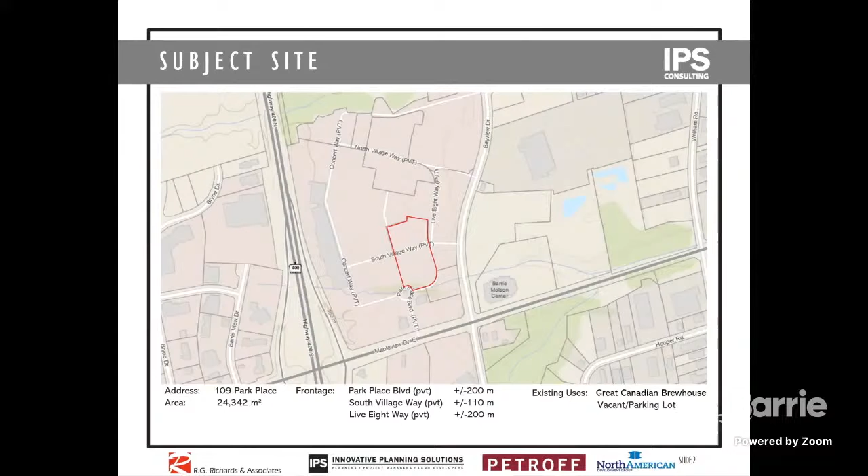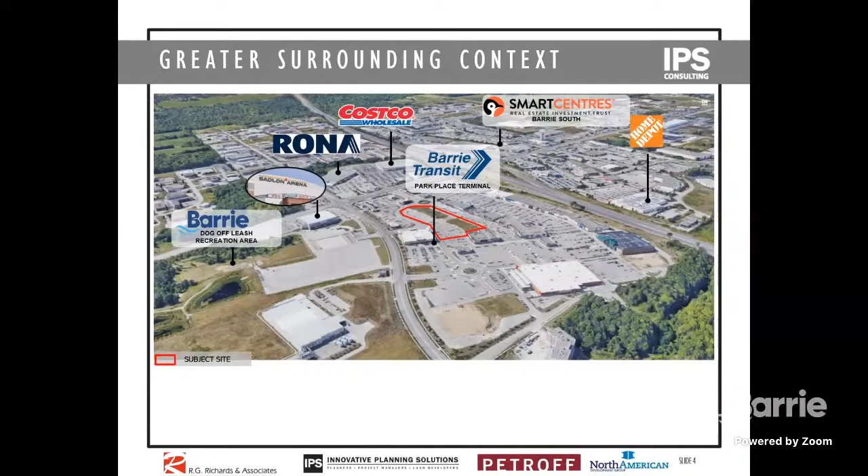For greater context surrounding the Park Place lands, there are a number of large big box users: the Rona, the Costco, the SmartCentres site located kitty corner to us at the interchange of Mapleview Drive and Highway 400, and also the Home Depot. I also want to note an important community building, the Sadlon Arena, and the Barrie Dog Off-Leash Park located beside the Sadlon Centre, used quite often by residents with dogs.

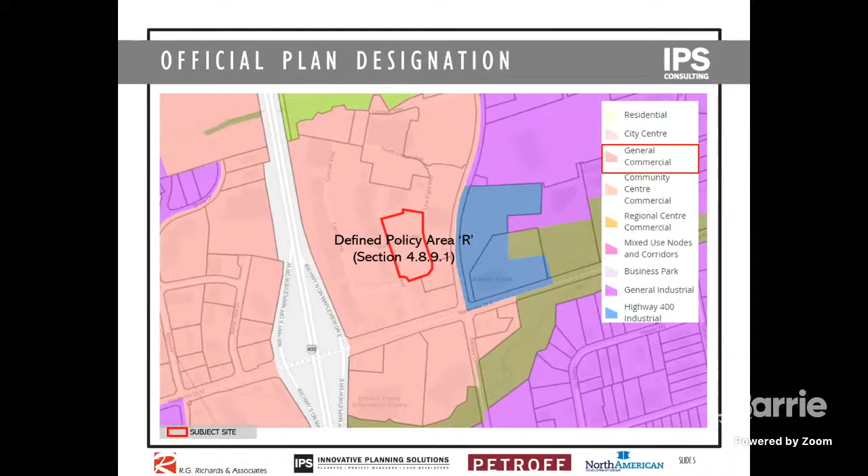The current official plan context for this site dates back to when these lands were subject to an Ontario Municipal Board hearing. Through that hearing, the lands were designated general commercial with a special provision. It's recognized in the city's official plan as defined policy area R. If you review the official plan under section 4.8.9.1, you would find the policies related to the Park Place lands and how they've developed to date.

Similarly, from a zoning perspective, the lands currently possess a general commercial C4 zone with a special exception. It's a very detailed exception relating to the overall master plan of Park Place Village, and those provisions are contained under section 304 of the bylaw.

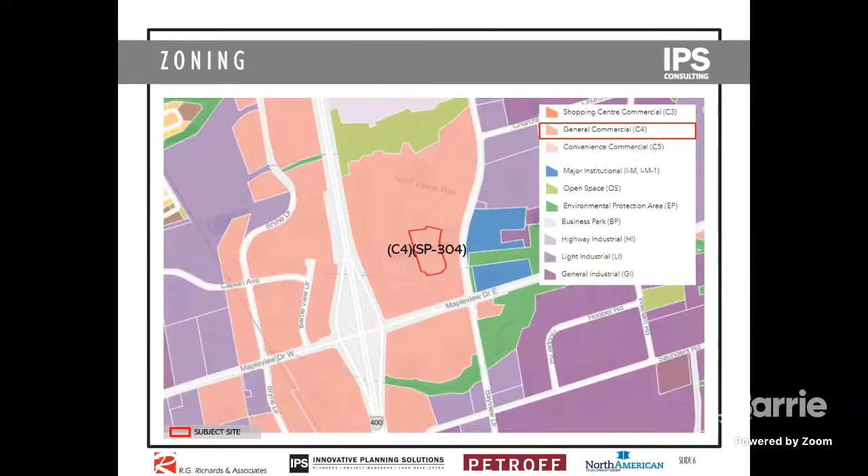So the amendments before you this evening are a first for Barrie, in the sense that we are proposing to add residential development to a regional commercial shopping area. That hasn't been done yet in Barrie, so we're excited to be first in bringing a new mixed-use style of development to a major regional destination. The amendments before planning staff and ultimately planning committee will seek to permit residential uses within the defined policy areas contained in the official plan, as well as the special provisions in the zoning bylaw under the general commercial zone.

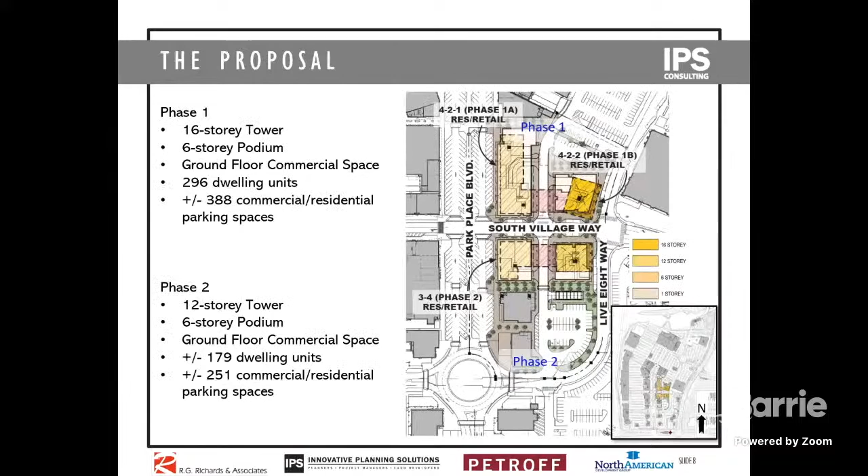With that, I'm going to turn the presentation over to Aly Hamby, who will describe the proposal. Thank you, Darren, and good evening everyone. My name is Aly Hamby. I am a partner at Petroff Partnership Architects.

Just for a bit of context and background, the Park Place Master Plan is centered around the theme of a main street, right in the heart of the property. It's a district where the design of the outdoor public areas emphasizes great pedestrian-friendly environments and well-appointed, accessible public spaces that create a unique open-air shopping experience. The illustration you see is a blown-up site plan of the new residential development within the village district.

And the inset drawing on the bottom right is a key plan showing the development in the context of the overall shopping center master plan.

When completed, this new community will be made up of 2 residential buildings with active at-grade uses, complemented by new landscape amenity areas. These are early days in the process, so in terms of residential statistics, we are talking about approximately 350,000 square feet of development that will take place over 2 phases, with an anticipated 475 units planned. Resident parking is planned to be located below grade generally, while resident visitor parking and retail patron parking will be located at grade.

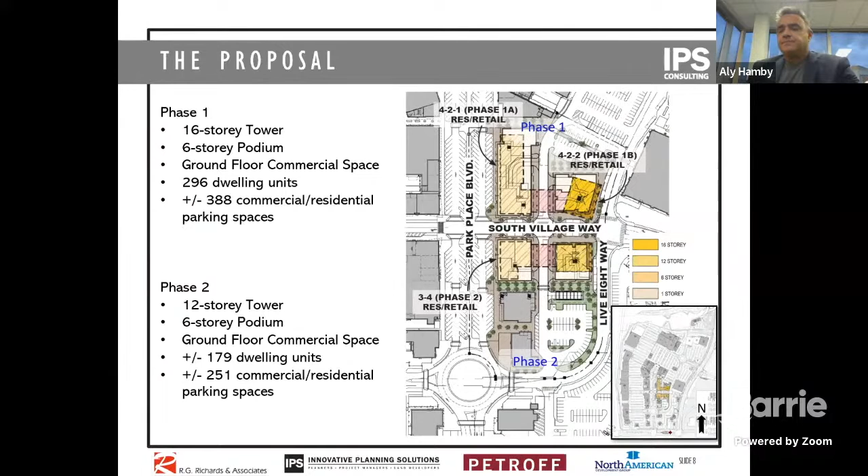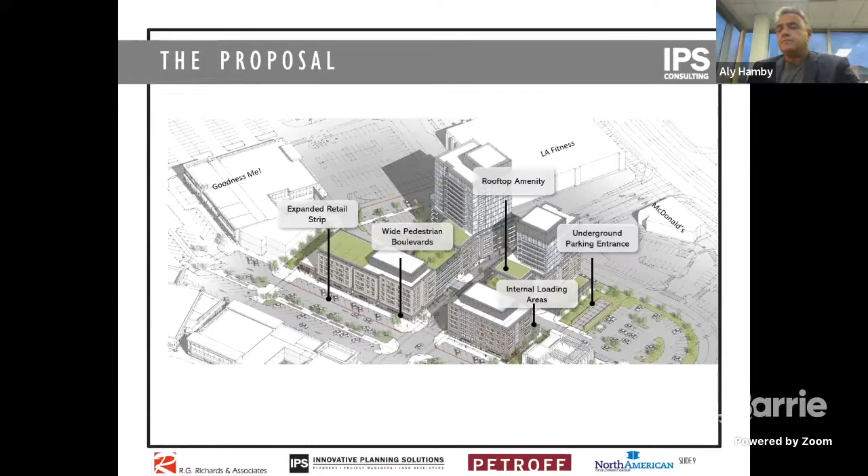Residential blocks fronting onto the village have been sized in terms of their length and height to be compatible with the existing village's pedestrian scale and are suitably proportional to the 40-meter wide village boulevard. This approach is best for maintaining the current open-air village experience and walkability while facilitating proper building height transition.

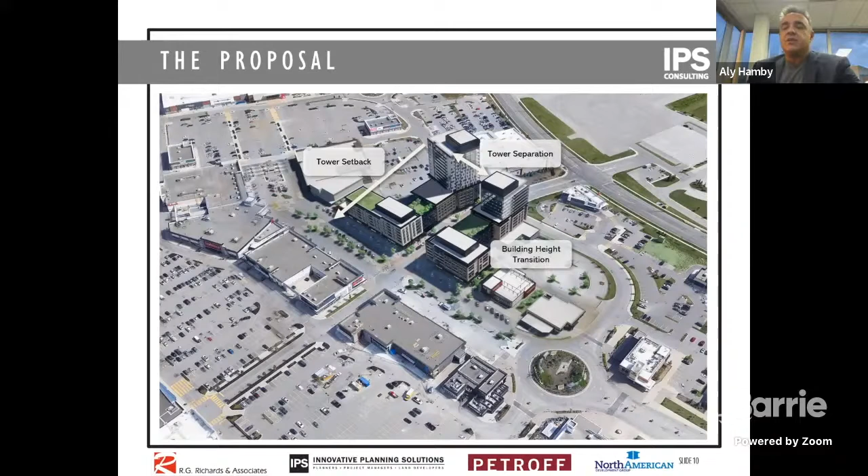Building height transition of the village is further achieved by locating the taller residential point block towers furthest away from the village. By keeping heights lower at the village, the 6-story blocks can still contribute to the village in a positive way while mitigating the impact of deep shadows sometimes associated with the taller residential blocks.

Durable premium finishes are planned for all of the new residential buildings that we are planning, and those finishes will maintain the same look and character of the material palette you see today on the retail village buildings.

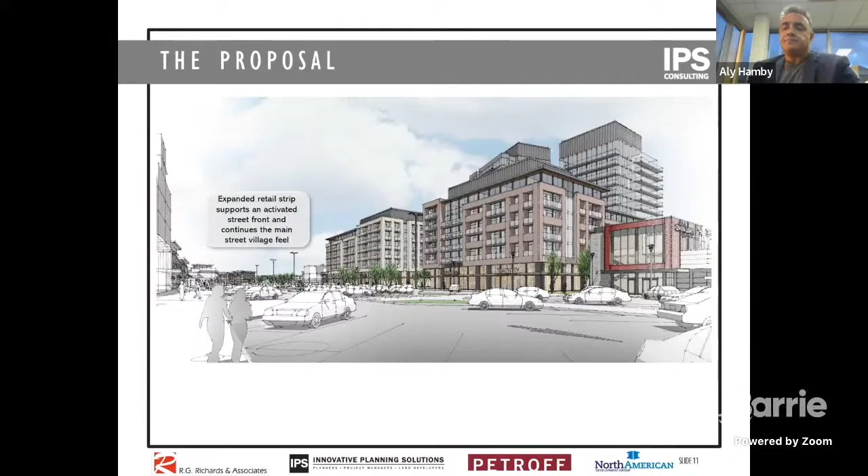The village district of Park Place has been designed from a pedestrian perspective with walkable streets, principal entrances, and active storefronts, and is very well suited to support residential intensification. We believe the village district will in fact become even more vibrant and engaging with the addition of the proposed residential blocks and their associated public areas.

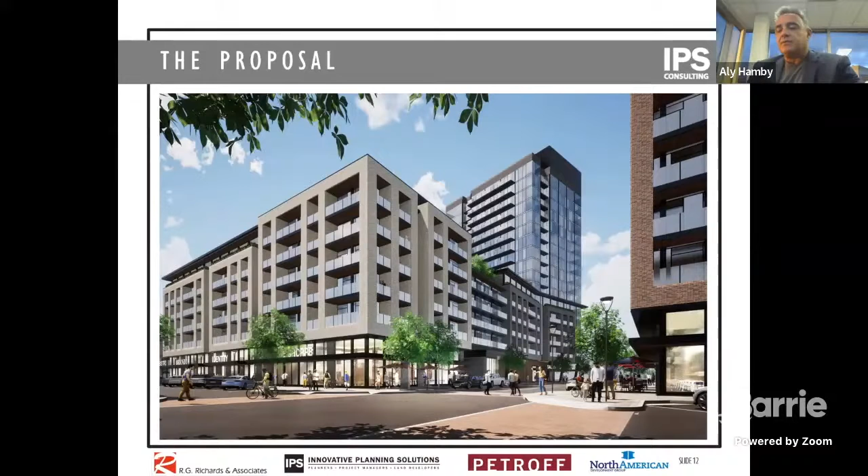In fact, our goal in designing the residential blocks is to further enhance and add to the village's already wonderfully landscaped sidewalks, amenities, patios, and plazas, all of which will benefit from the natural surveillance and overlook that the new residential will offer by way of upper story apartment windows, balconies, and rooftop amenity terraces.

Residential blocks fronting on the village will maintain the same active retail and restaurant uses at grade that we see today on the existing main street. And with the expansion east, we will create a new opportunity to expand the commercial frontage to meet the new point block towers. This village expansion east allows us to improve and reinforce existing connections to Bayview Drive and to existing locations on site such as the Barrie Transit Bus Hub and LA Fitness.

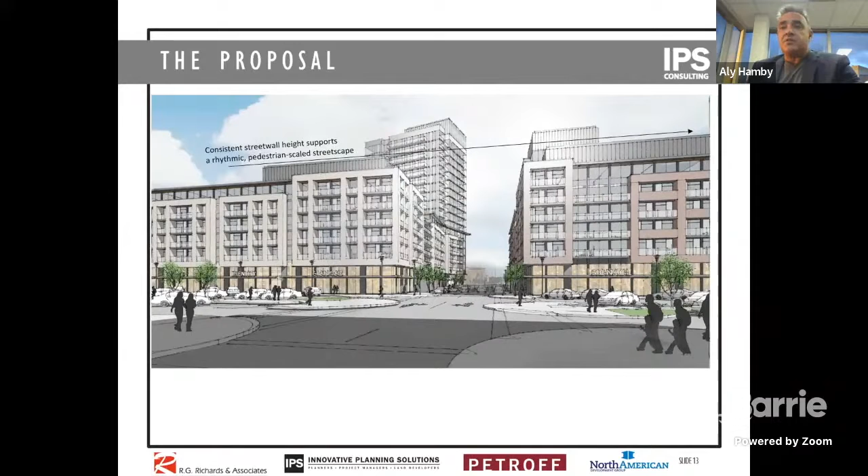We are really excited about the idea of introducing residential to this established center and the synergies that will be created with the many shops and services that will be accessible from the new residence doorstep.

In fact, the Park Place Master Plan has in place numerous pedestrian connections and linkages, as Darren alluded, to many community-oriented amenities, all within a 15-minute walk from the proposed residential development, including many shops, restaurants, and services, a 20-acre naturalized park, the Barrie Transit Bus Hub, a dog run park, and the Barrie Colts Entertainment Complex.

These connections and linkages for the Park Place Master Plan is the framework that it's built on, and it's one that supports mixed-use intensification at this center, as well as supports the outdoor public spaces that we will add to make such developments a success, such as this example, a proposed pocket park that we are imagining that will be located right off of the village main street.

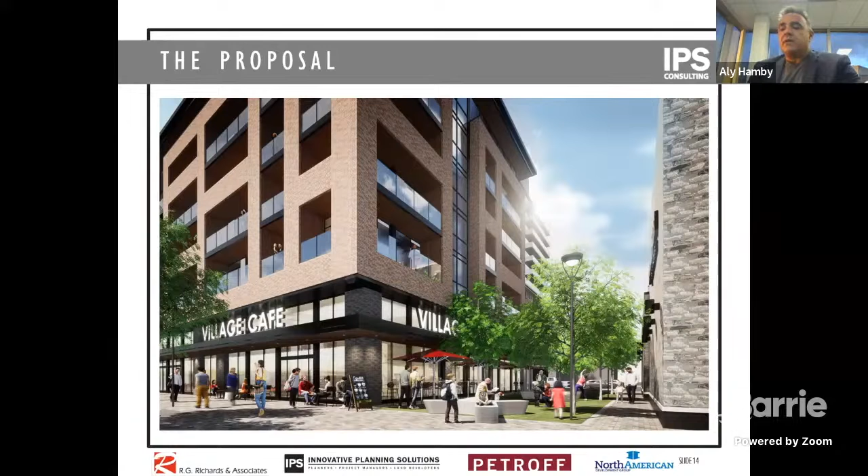And so in closing, I'd like to say that as a team, we are really excited to advance this opportunity to see residential intensification at Park Place. Through our continued consultation with the city and the community, our goal for this property is to see it continue to thrive and to evolve from taller buildings and higher densities into a true mixed-use complete community that will support the growth, the future growth and the longevity of this popular lifestyle center and this area in South Barrie.

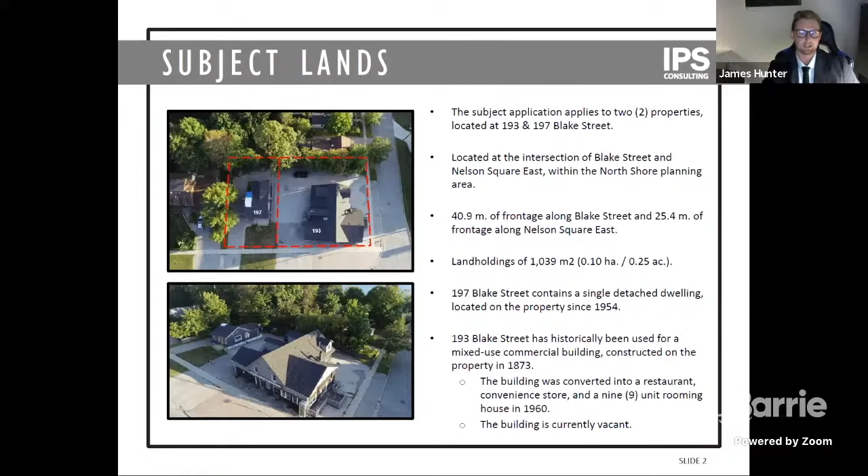The 197 property contains a single detached dwelling that has been located on the property since 1954. The 193 Blake Street property has historically been used for a mixed-use building, which has been on the property since 1873. The building was converted into a restaurant, convenience store, and a 9-unit rooming house in 1960. However, this building has been vacant for a number of years.

The surrounding land uses of the subject lands are quite diverse. To the north is general commercial, then low density residential further north. To the east is low density residential primarily, and along Vancouver Street there is a 4-story condo, a 4-story apartment, and a 3-story apartment. To the south is low density residential, and adjacent to the west is the Parkview Community Center, as well as Nelson Square Park, and then a mix of low density residential and the Nelson Square lookout.

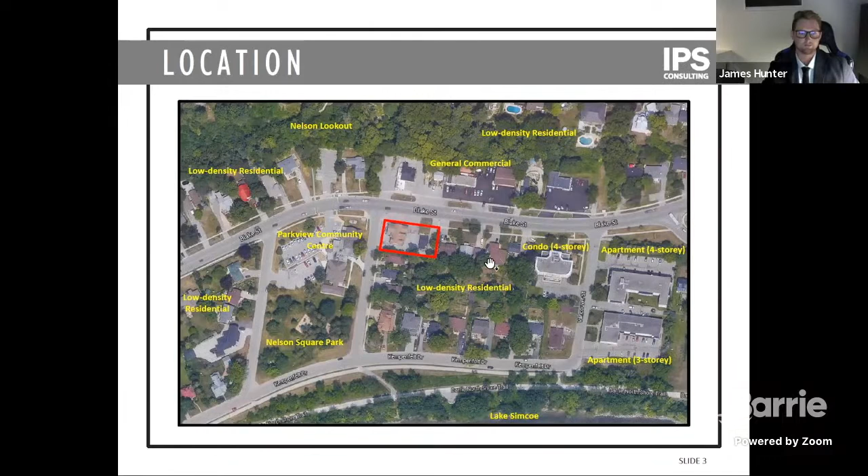The application before us is a 5 townhouse unit development with a 4-story building height. The density proposed is 48 units per hectare. Each lot will have a range of size from 183 to 242 square meters, with frontages ranging from 7.2 to 10.1 meters.

Larger unit sizes are proposed, between 217 and 222 square meters, which is in the mid 2,000 square feet range. Site access for each unit is off Blake Street, with a singular access by a double driveway to units B, C, D, E, and one driveway to lot A. This represents a parking ratio of 3 spaces per unit for 4 of the units, and the end unit has a parking ratio of 2 spaces per unit.

We've included a 7-meter front yard setback, as well as a 7.1 meter rear yard setback, and then we have a 3-meter exterior side yard to Nelson Square East.

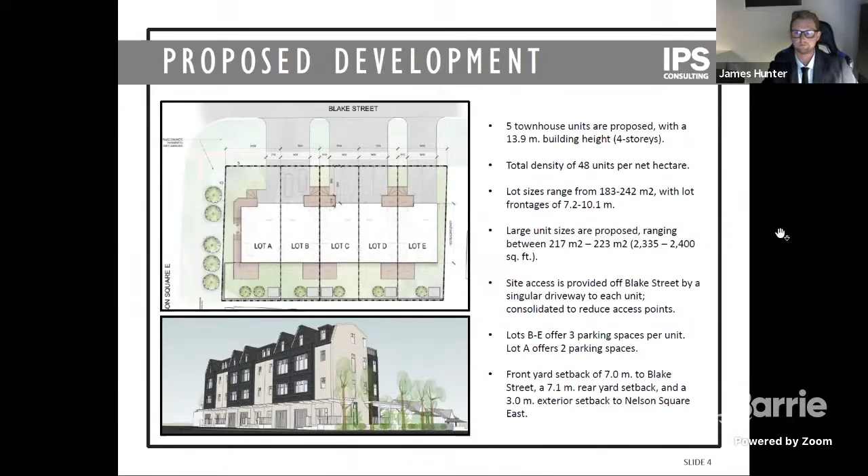The applicant is targeting a high standard of architectural design to match the local market and quality of homes in the surrounding neighborhood towards the shore. The images here are conceptual renderings of what the potential townhouse is to look like.

What we do have included are amenities on the 4th floor, including a private loft and a terrace overlooking the rear yards. We have a flex space on the ground floor level for a home office or a gym, and we also have 91 to 125 square meters of landscaped outdoor amenity space in the rear yard, which provides private patios.

At the corner location, the exterior unit has been designed to frame the street corner, providing heightened curbside appeal and a pedestrian-scaled built form. The landscaped open space has been preserved around the perimeter of the site to implement enhanced landscaping measures and an improved public realm.

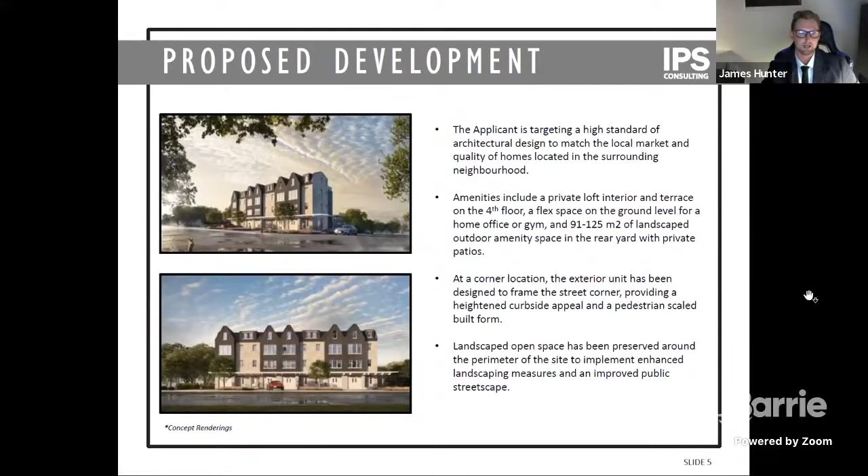The subject lands are currently designated as general commercial by the 2018 official plan. They are located on Arterial Road, which is Blake Street, and are also within the built up area. In order to permit a townhouse development, we need an official plan amendment to the residential land use designation.

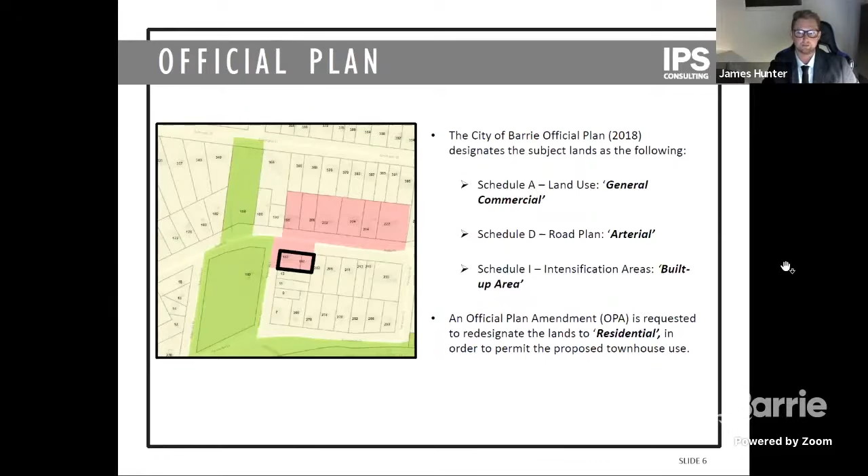To provide a brief overview of the official plan, the residential land use designation does permit all forms of tenure housing. The lands are within the built-up area, which the plan directs at least 40% of residential dwelling unit development to be within on an annual basis. Intensification represents an essential component of the city's growth management strategy, with support for medium density developments in order to provide a complete range of housing choices for residents.

Intensification and redevelopment is encouraged to promote an increase in planned and built densities and to achieve a desirable compact urban form. The proposed development does satisfy the locational criteria and the staging and phasing policies of the official plan. The official plan directs the zoning bylaw to be amended to allow for innovative housing, where it is recognized to be in accordance with good land use planning principles. In summary, the subject development is supported by the objectives of the official plan.

To accompany the official plan amendment, we are also seeking a zoning bylaw amendment. The subject lands are currently zoned general commercial C4, and to permit a townhouse development, we need a zoning bylaw amendment to the residential multiple dwelling second density, the RM2TH zone, along with our rezoning requesting site-specific special provisions.

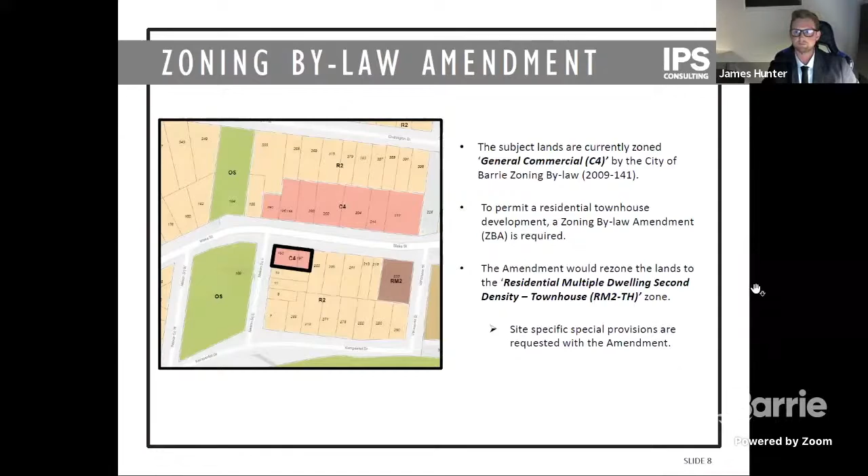To support our application, a number of technical studies have been done, including a planning justification report, a market study, a shadow analysis, engineering report, geotechnical report, hydrogeological assessment, arborist assessment, architectural drawings and elevations, and phase 1 and 2 environmental site assessments.

In conclusion, the applications would permit the development of 5 townhouse units. To permit this development, we would need an official plan amendment from general commercial to residential, as well as a subsequent zoning bylaw amendment application to rezone the lands from general commercial C4 to residential multiple dwelling second density townhouse with special provisions.

Development through intensification is supported as it efficiently utilizes land, existing infrastructure and services, and contributes to a more desirable compact form. The proposed development offers suitable residential intensification within the built-up area of the city on lands that are underutilized and ready for redevelopment. In support of improved housing attainability, the proposal would contribute to diversified housing options in the city, while also assisting the city in achieving its directed housing and density targets.

Collectively, the development does align with all levels of policy, seeking evolution into more complete communities. Thank you, Planning Committee, that concludes my presentation. I would be happy to answer any questions directed my way.

Thank you very much, Mr. Hunter. I will, yes, and Tyler Butler is our planner. I confused the names earlier. I'm sorry, Tyler. Thank you for coming to Planning Committee tonight, and if you can give us an update on the status of the application.

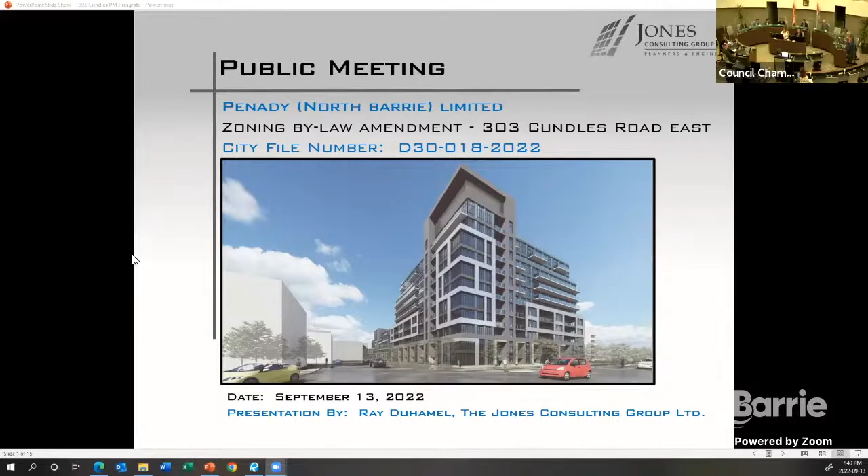The lands themselves are proposed for residential, and I'll speak to that in a few minutes. These form part of a much larger master plan block, which substantially has been developed to the east with regional and local level shopping, including retail, a gas bar, and a number of service commercial uses. The master plan is approved for upwards of 500,000 square feet for that area, and immediately to the west is the Junction residential development.

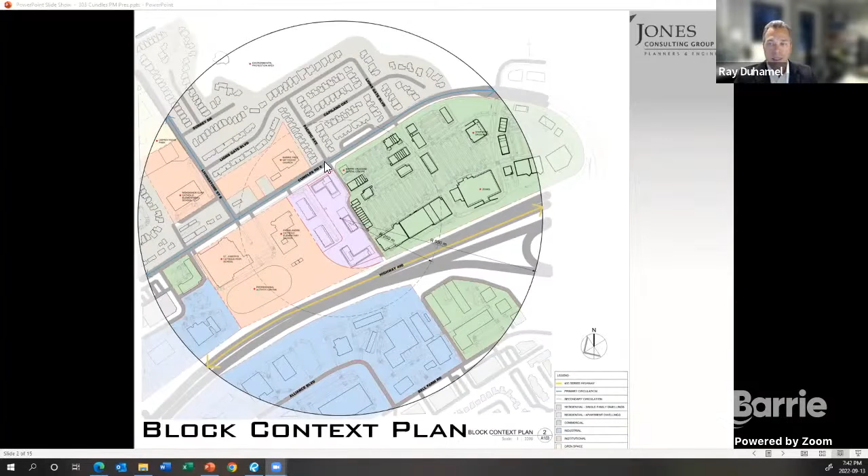This next slide shows an aerial photograph of the property. It's currently vacant. The site is 1.93 hectares of an overall 18-hectare site that's been comprehensively developed, with 74 meters of frontage on Cundles Road East on this particular part of the property. The right side of the screen is zoomed in to give more detail, showing the existing commercial, and the 2 buildings immediately to the west, the junction residential buildings.

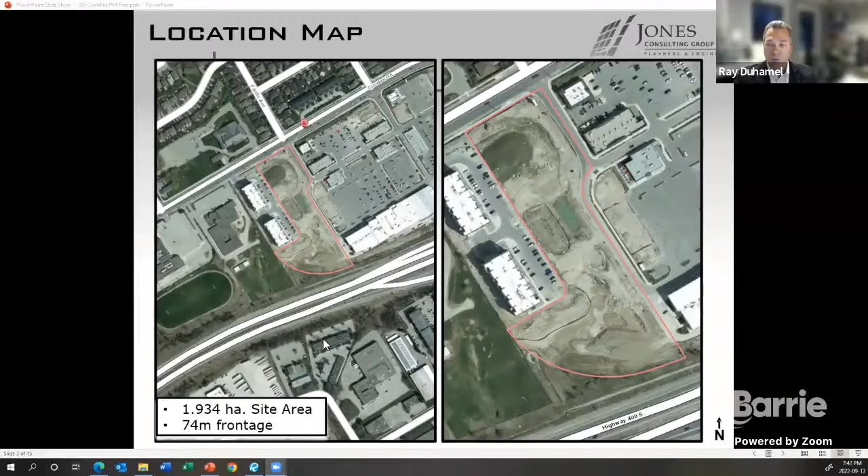A few streetscape shots to provide some context. Immediately across the street to the north is the Free Methodist Church, and then there's the exterior side yard of a single detached dwelling fronting onto Pacific Avenue. If you're looking east from Cundles Road, you'll see the commercial development that exists.

That's part of the master planned 18-hectare site. Looking south on Cundles Road, straight south, you can see Highway 400 in the background. And on this plan and the plan to the west, you can see the junction residential development of 6 stories and 120 residential units.

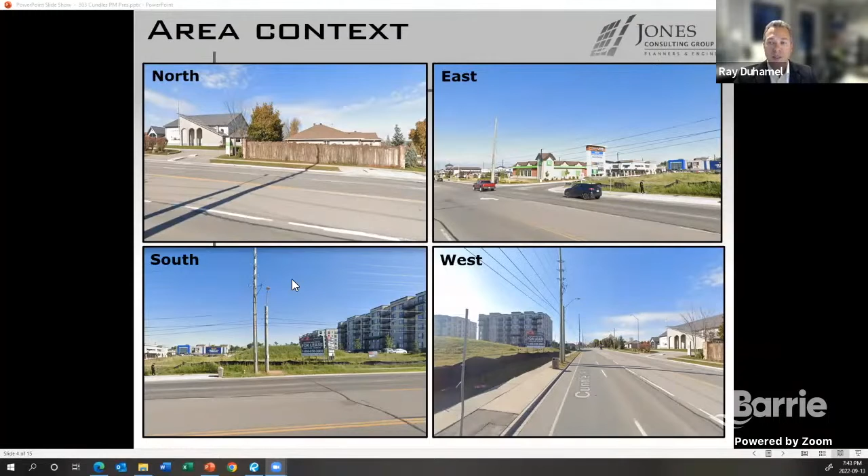This site has a long history of planning approvals and master planning, dating back to 2006, when an official plan amendment was adopted by council to permit mixed-use development on the lands. There was a corresponding zoning bylaw amendment approved also in 2006 to permit a mixture of residential and commercial. Another zoning bylaw amendment was approved in 2015 that allowed for an established parking ratio, and the current zoning permits 200 units across this entire residential site.

There was a series of master development agreements and plans developed over the years 2012 to 2013. The most recent activity on the site is the construction of the junction. The approvals were granted in 2016 for both a zoning bylaw amendment and site plan approval.

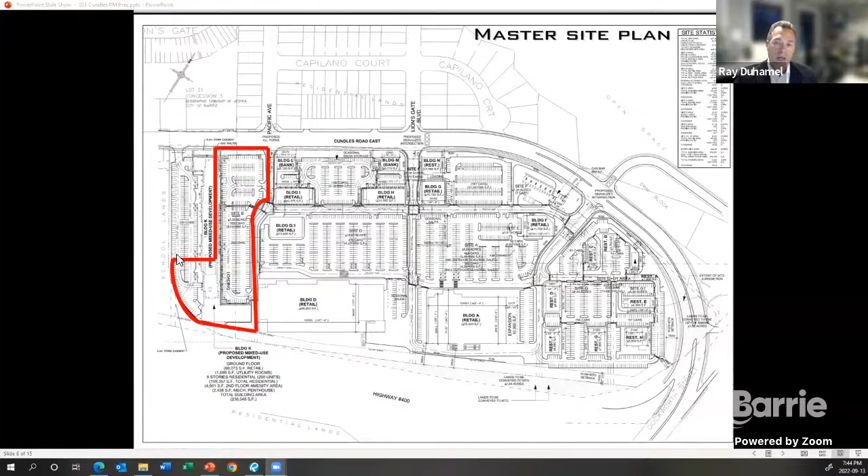There's so much detail in this plan. I just wanted to show it for illustrative purposes because this is about 10 years old now. This is the master plan showing the overall development of this whole site. What's changed is really the junction area and this area in red, which is the proposed 303 Cundles Road East.

The provincial policy statement and the growth plan are fairly integral documents to land use planning in Ontario, as I'm sure most are aware. Both of these documents have been amended several times. There's actually been an entirely new provincial policy statement twice since the original 2006 master plan for this overall site was approved. But overall, in my view, the proposed application, as I will illustrate in a few slides, implements the provincial direction towards creating compact and efficient use of land and optimizing existing infrastructure on the site.

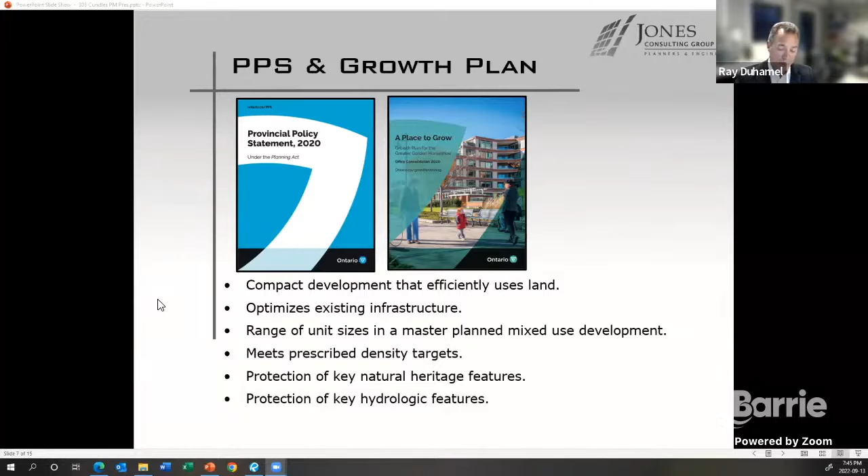So the next 2 slides, I'm going to speak about the city's official plan. The previous 2 meetings talked about the official plan, so I'll just provide a little more context. An official plan is a land use planning document that guides land use planning decisions over a period of time.

In this case, this is the consolidated official plan of 2018. This was first planned and put together around 2007 and ultimately approved by the ministry in 2010, planning out to 2031. What this plan included was that this whole property, this master plan property, is designated as general commercial. Specifically, as you heard previously, there was an amendment incorporated into the plan recognizing that this is mixed-use commercial and residential.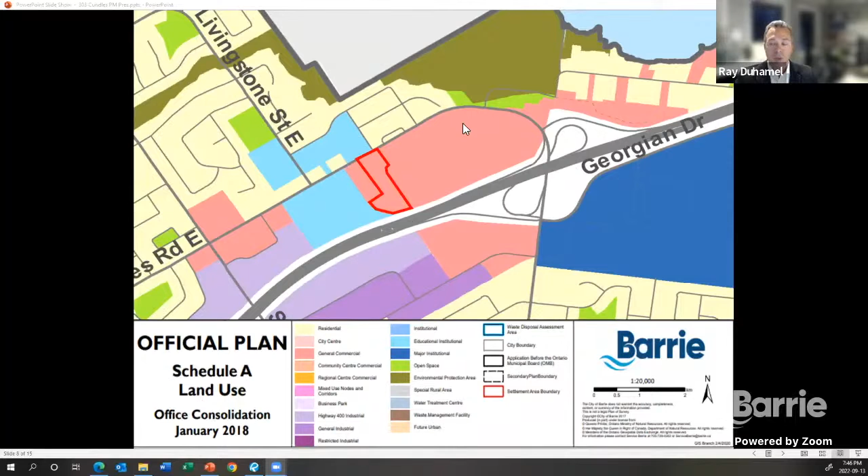And there's also a fairly momentous undertaking this year in 2022 in terms of recent planning history in Barrie. This council adopted Barrie's new official plan in February, and it's now sitting with the province, hopefully for imminent final approval. What's notable about the new official plan is that where the previous plan planned to the year 2031, this new plan will replace the current one and plans out to the year 2051.

And because it's been adopted by council, it's relevant to the overall application that's been put forward. There are two key components of the OP I wanted to share with you among hundreds of pages. The first is that this property and everything south of Cundles Road is all within what's known as a strategic growth area.

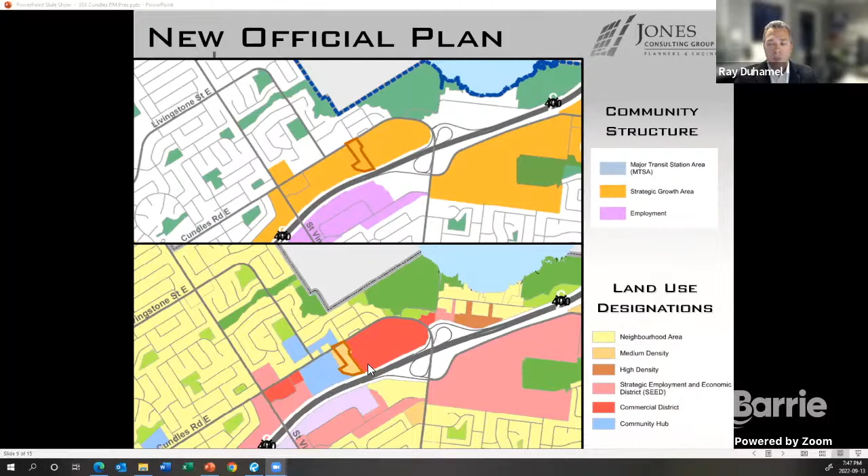It's not determinative, but it's helped inform the application that is before you this evening. The current site is zoned commercial C4, a general commercial zone, with some special provisions dating back from 2006 and 2015, and the junction amendment in 2016 overall.

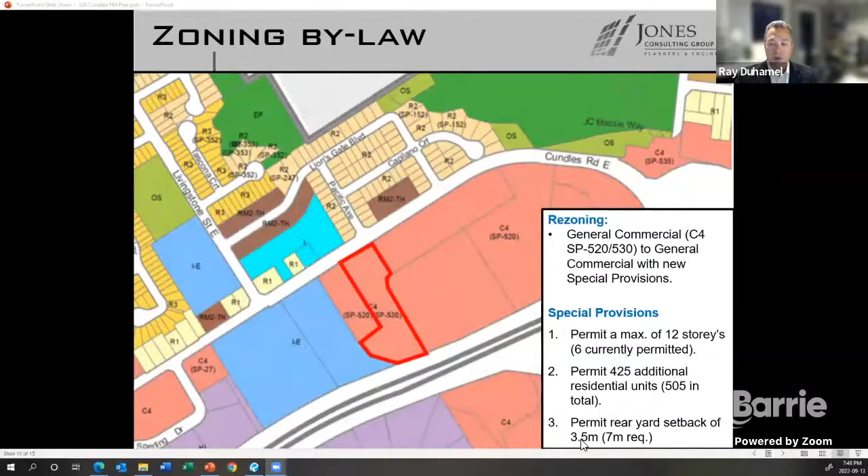There's a proposed zoning bylaw amendment, which is the purpose of this meeting this evening, to permit a maximum of 12-story buildings, permit 425 additional residential units (505 in total), and permit a rear yard setback of 3.5 meters adjacent to Highway 400.

We followed the prescribed planning process, which included pre-consultation in February 2021, where we received feedback from city departments and agencies on the proposed application. Then there was a virtual neighborhood meeting held in June 2021 that reviewed and discussed this plan as substantially shown: 3 buildings, all 10 stories high, with an internal street layout, linking in with the existing private street network here and connecting out across the road from Pacific Avenue.

During the neighborhood meeting and pre-consultation, there were basically 6 major themes identified as comments and concerns. I've listed them in order of effectively how many people and how many comments were geared towards each one. By far, I think the most comments were made towards traffic.

As a result, as part of the formal zoning bylaw amendment application, a detailed traffic study was prepared by the BA group, which reviewed the planned traffic, the current existing development traffic, and the future growth traffic in the area to identify whether or not the proposed development can be accommodated by the existing road and infrastructure. The study concluded that it is.

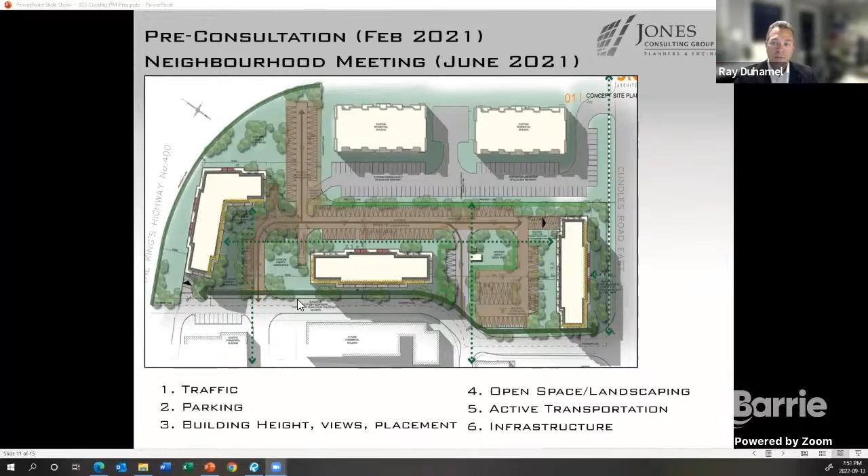I'd just like to highlight the supporting information available on the City of Barrie's website. The city's website is excellent. It contains the full submission materials, and members of the public are welcome to go on the city's website and download and read any of the studies and plans.

I encourage you specifically, if I suspect the most concerns are parking and traffic, to look at this study right here. There's also a sun and shadow plan, and I noticed there were some comments from the public record today on sun and shadows. If you're not sure where those are, the city planner, Celeste Kitsimetry, can contact you and help navigate you to where those are located on the city's website.

Here is the revised site plan submitted with the application. The most notable change is that where there were 3 buildings of 10 stories each proposed before, there are now still three buildings, but they've been staggered in height. The taller building is pushed adjacent to Highway 400, at 12 stories; 11 stories adjacent to Cundles Road; and 8 stories in the mid building.

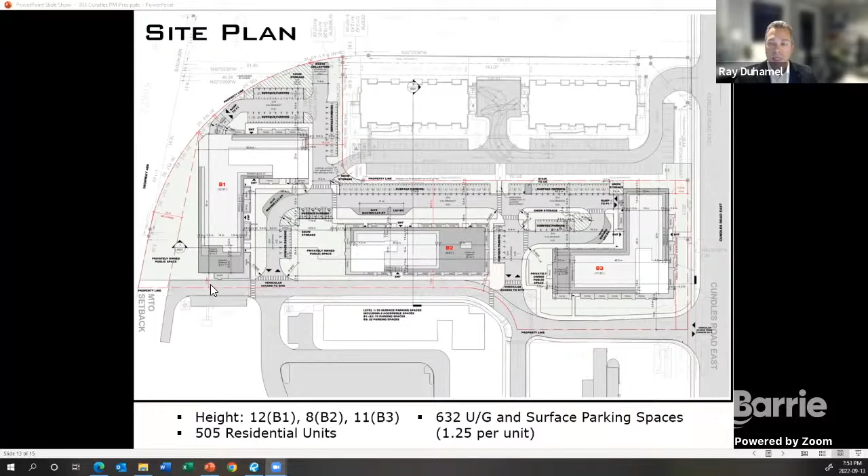Their architect has done a great job integrating step backs and variations in the buildings to decrease the massing on the site. Overall, there's 505 residential units in total, and about 632 underground and surface parking spaces, equating to a ratio of 1.25, which aligns with what was contained in the parking study by BA. Just a couple more slides, and then we'll open it up to the public, your worship, members of committee.

Here are a couple images illustrating the plan and how it has been oriented towards the main intersection of the site across from Pacific Avenue. The massing is oriented towards that intersection. You can see the integration of step backs, the variation in use of balconies and building materials, and there are individual at-grade uses for individual access and activation of the streetscape.

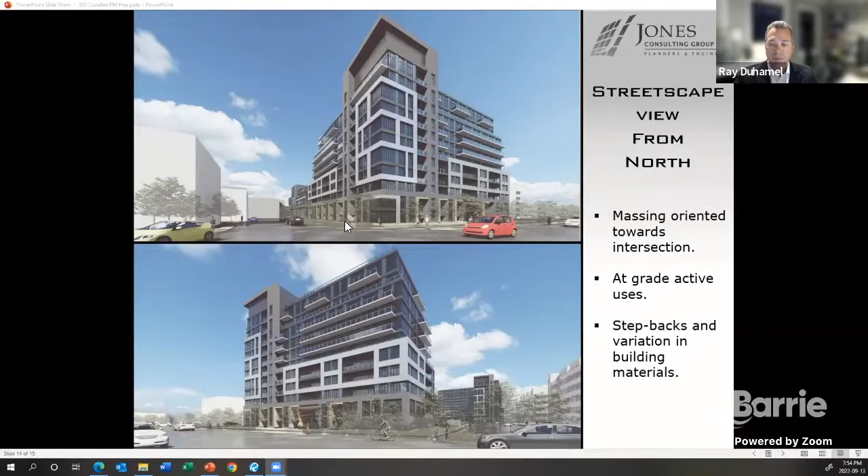This slide, I thought residents online or in the council chambers would appreciate seeing the perspectives in relationship to the adjacent Junction residential developments. I'm only showing a few slides; if they go onto the city's website, there's a fulsome architectural package submitted as part of the application with a lot more information. But this provides the context of the relationship with buildings.

You can see the stepping of the buildings; they're not all uniformly 12, 11, and 8 stories in height. There's variation in the buildings and variations in materials and articulation, as you can see in both. There's also spatial separation, as you can see with the parking lot for the Junction, and additional parking lot that provides spatial separation in the center portion of the site.

That concludes my presentation, your worship, members of the committee. I would be happy to answer any questions, and I will stop sharing.

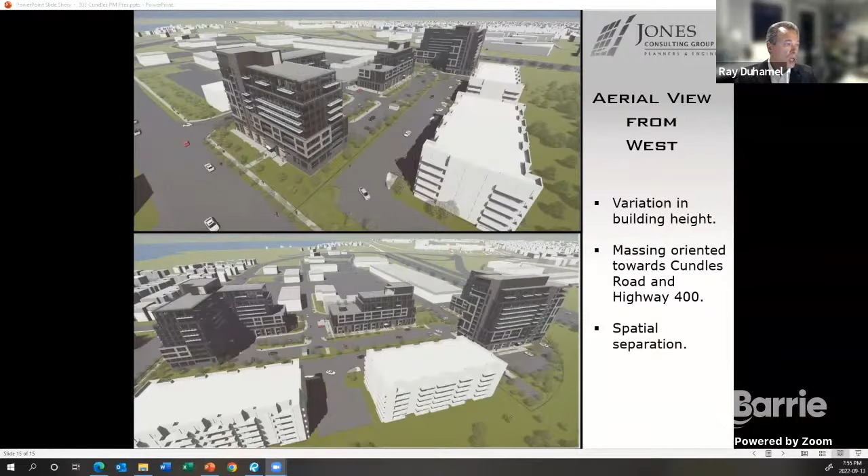Okay, thanks, Mr. Duhamel. I'll ask Celeste Kitsimetry, our senior planner, to come to the podium to give us an update on the status of the application.

Thank you, Mayor Lehman, members of Planning Committee and the public. Further to Mr. Duhamel's presentation and the memo provided to Planning Committee by staff, I will provide a quick update regarding the status of the application and the preliminary planning and land use matters being considered. I would also like to note that in addition to the neighborhood meeting, which was well attended and referenced by Mr. Duhamel, there are several pieces of correspondence and emails provided to Planning Committee as circulation items with the agenda tonight.

Each of the comments received will be considered by staff and addressed in the staff report moving forward. As noted by Mr. Duhamel, the zoning bylaw amendment is to amend something that already has site-specific provisions for residential use on the subject commercial site.